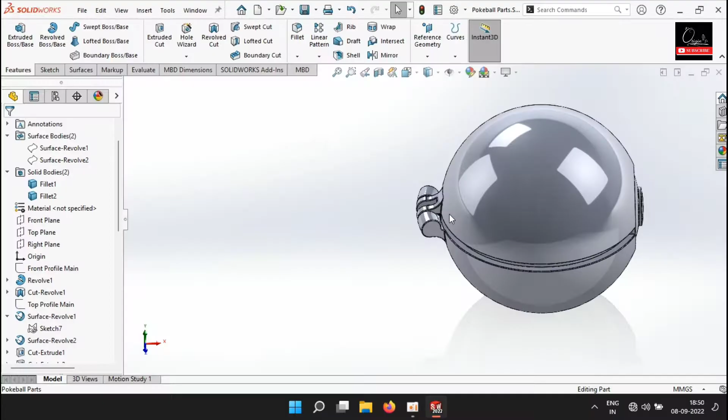In this session, we are going to make the reflector glass to be fitted in the Pokeball and separate out these bodies to be used in assembly without creating separate part files. We will begin by making only the bottom half visible. Select plane 1, choose section view and click OK.

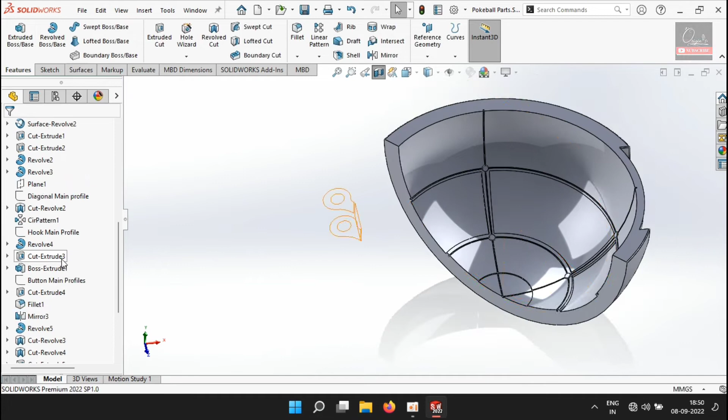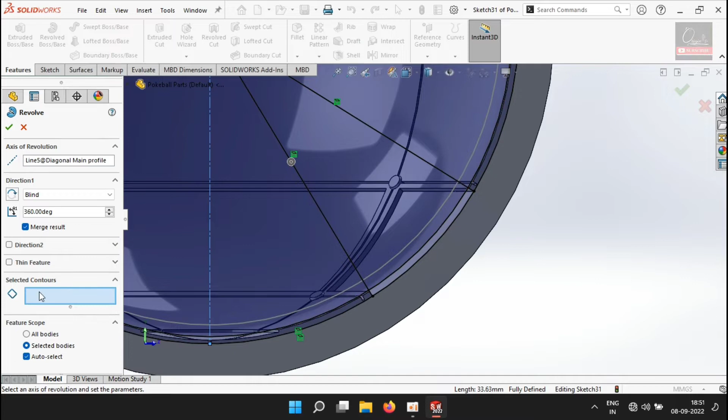Now make the diagonal main profile visible again and view plane 1 from normal direction. Select these profiles and click on Convert Entities. Go to Features tab, choose Revolve Boss/Base and repeat after me. Remember to keep this one unmerged. With this, all our components of the Pokeball toy are complete.

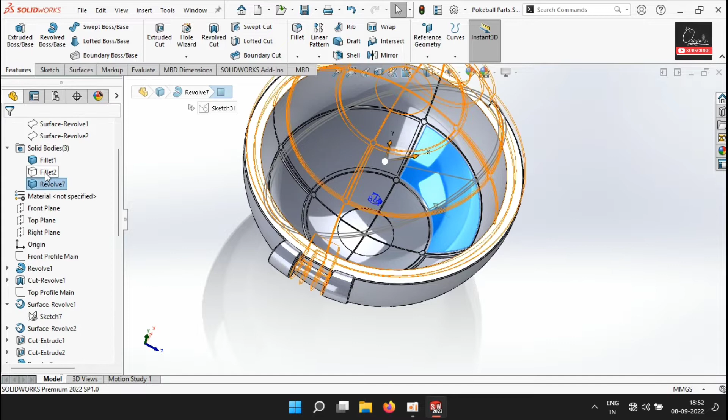Now, many of you must be wondering why we didn't use circular pattern on glass to make its copies. The answer to that, my friend, is quite simple. Even if we made copies and completed it in such a way, of course we could get all the dimensions required for manufacturing. But we wouldn't be able to create a motion animation of this component as all of them are fixed. So, we are going to convert this into an assembly.

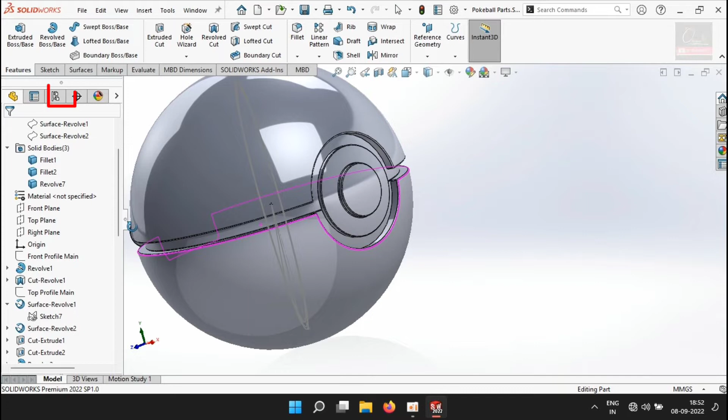From an industrial point of view, we need to properly document the files for storage and easy access in future. Therefore, rather than separating the solid bodies into separate part files, we will be separating them in this file itself using the configuration feature. Click on configuration pane, add configurations with the same name as me and rename the default one as well.

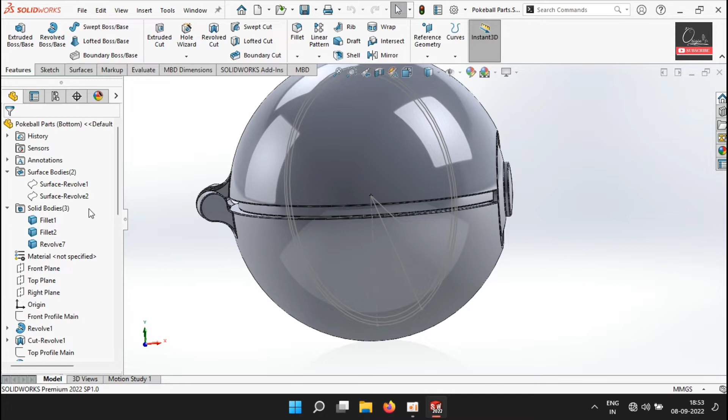Now double-click on bottom configuration to enable it and go back to design tree. Select the inner glass and top half from the solid bodies drop-down, right-click on them and choose Delete/Keep Bodies option and click OK. Now this feature will be present in all configurations but will be suppressed in the other ones.

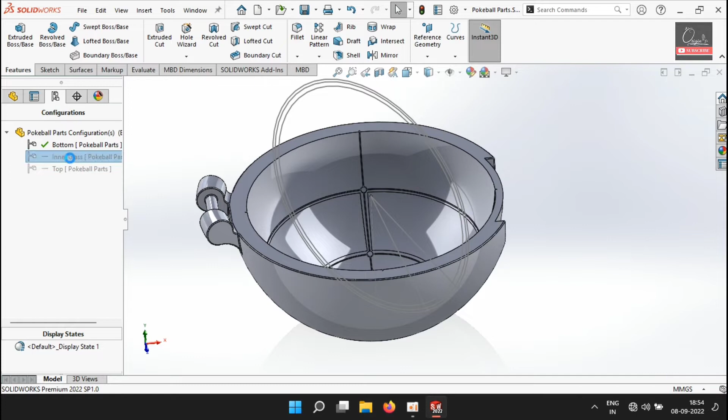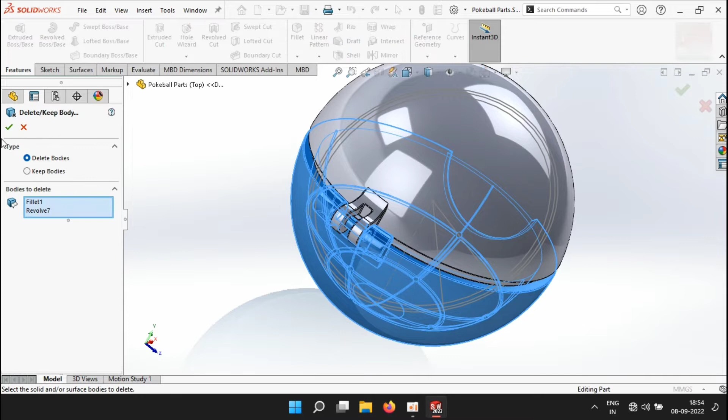So, we will follow this same procedure to isolate the respective parts in their configurations without altering the whole part, and also maintain the dependent dimensional relationships. With this, all that's left is to color our design. So just follow my lead.

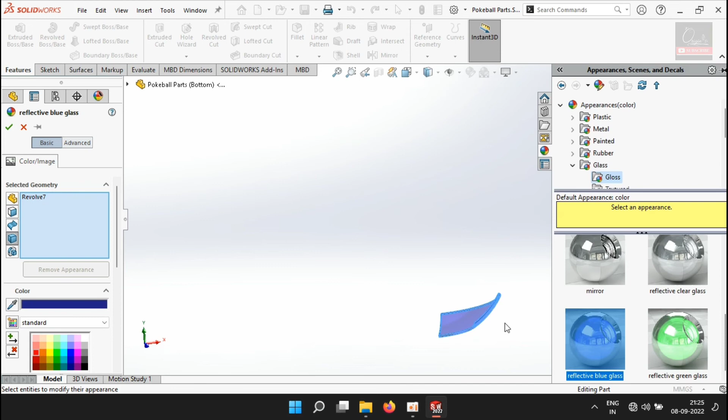Next time, we will be completing the assembly of the Pokeball and make a motion animation video of the same.